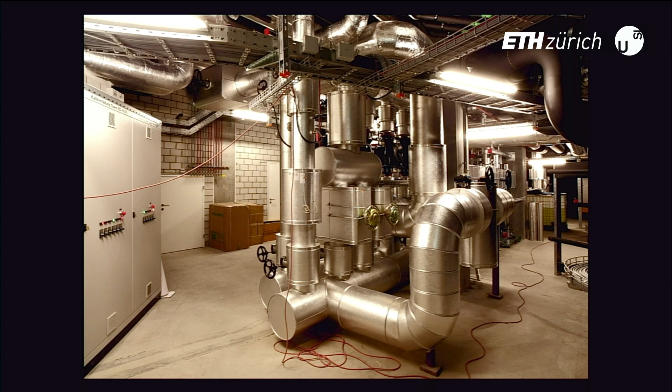However, the building materials stand in relation to other substances, to fuels, to pollutants. In fact, today, we all lack an intuitive imagination of these counterparts of the solid materials. We lack an imagination of the liquids and gases that contain energy, of electricity, and energy without substance. And even more, do we lack an idea of their quantitative measures.

Paradoxically, because we all got used to the availability of so much, and I say cheap energy. For most of us, the image of these substances and types of energy manifests itself primarily through their appliances, containers, screens, control equipment, pipes, ducts, lines, switches, intakes, exhausts. We place them in the basement, make them disappear, cover them up for different reasons, noise, smells, and of course, for reason of safety.

Even less do we grasp the carbon footprint that our buildings leave in the atmosphere, and more generally, our way of life. Around 37% of the worldwide CO2 emissions are presumably caused by buildings and by households, by the use for heating, cooling, hot water, appliances, etc. So my idea of architecture as a happy interlocking, a kind of marriage between the Earth's crust and the atmosphere, has gone out of balance.

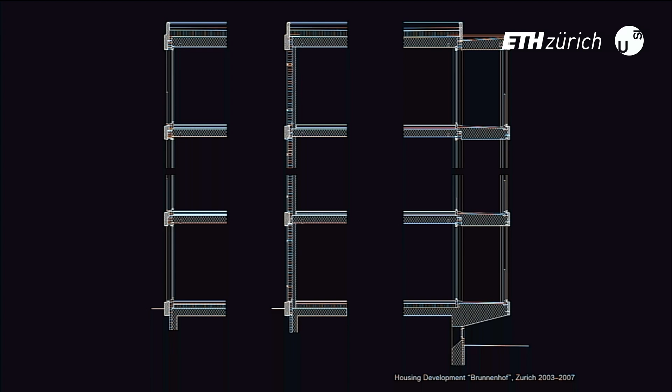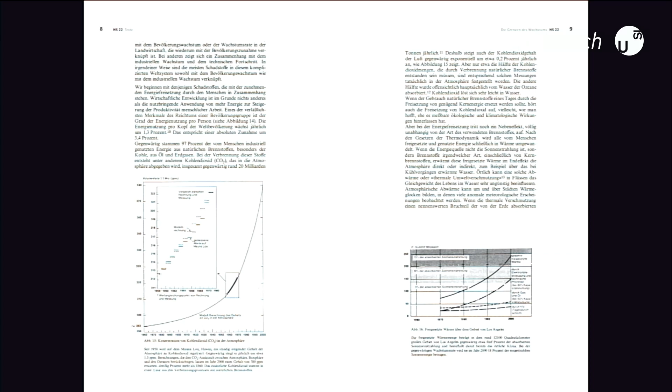I start again with the limits of growth, this wake-up call 50 years ago. And although the book was mainly about the finiteness of resources, a small graph already showed the increase of greenhouse gases. This forecast turned out to be correct. Charts from the BAFU, Federal Office for the Environment, with falling and rising curves. For instance, the annual measurement of CO2 concentration in the air on Mauna Loa, 425 ppm this year.

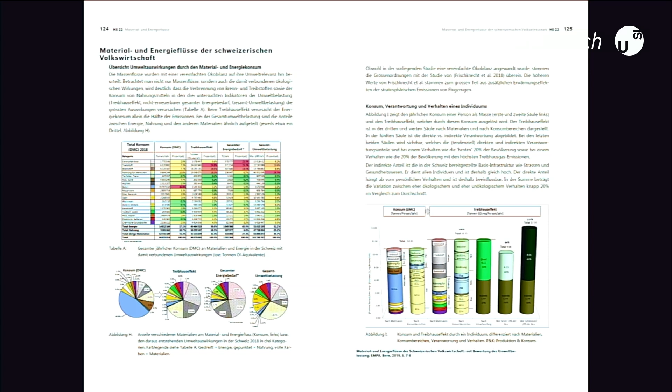In the reader, you find a chapter on material and energy flows in Switzerland. For instance, these data from the EMPA, all shown in pie charts and bar charts. And concrete appears in blue, very prominent in this representation by weight in the lower left pie chart, but less so in the representation by greenhouse gases, the second left.

These bar charts show more clearly the ratios of greenhouse gas emissions. The left bar is for the buildings and their use, middle is for mobility, and the right bar is for consumer goods and production. The most striking quantities we find for the emissions for fuels for heating. This is the dark gray in the left building bar. And then fuels for mobility, the bright gray in the middle bar, and for food, the light green in the right bar for consumer goods.

But of course, the building construction with the various materials also adds a considerable quantity of greenhouse gases. You see in the left bar, again, the concrete in blue, the brick in orange, glass bright blue, steel yellow. They are not a negligible quantity. So we tried to take a closer look, an unbiased look at the materials we love so much, through the lens of energy consumption and CO2 emissions.

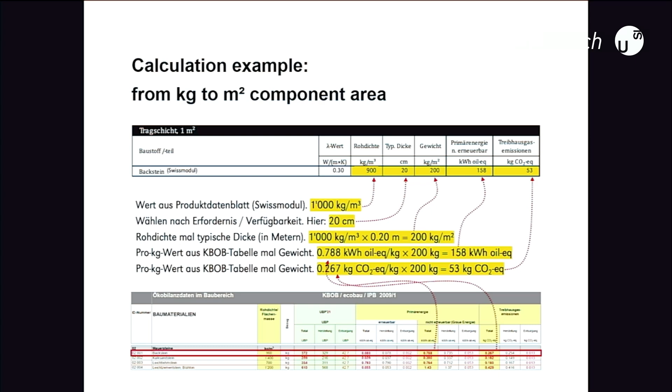On the different data, it's not difficult to calculate. You just need to know the rule of three. And you need to know which column of figures are relevant, of course, and also check the specific weight of the materials. But yes, the eco tool of ZPF structural engineers with Professor Jacqueline Pauli is more efficient if you have the skills to use it.

We took, for example, 1 square meter reinforced concrete wall, 20 centimeters thick, with reinforcing steel as a benchmark, as a kind of currency to compare with other materials. What does this bad guy do? 1 square meter concrete wall causes about 60 kilograms CO2 equivalent of grey emissions for construction and disposal. And the steel reinforcing in it, with approximately 18 kilograms, contributes then to 1/3 of the greenhouse gases.

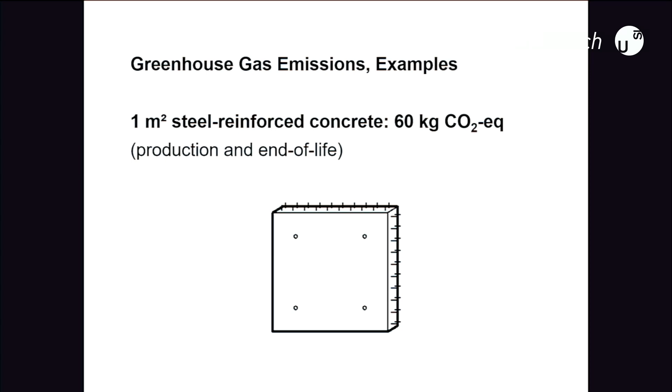And another example, we also compared with the emissions for heating. 1 single heating with natural gas in order to compensate for the heat loss in the uninsulated concrete wall in Zurich costs approximately 70 kilogram CO2 equivalent. This means the heating under these conditions releases more CO2 in 1 single year than the construction of the wall cost, which might last for half a century, it depends on us.

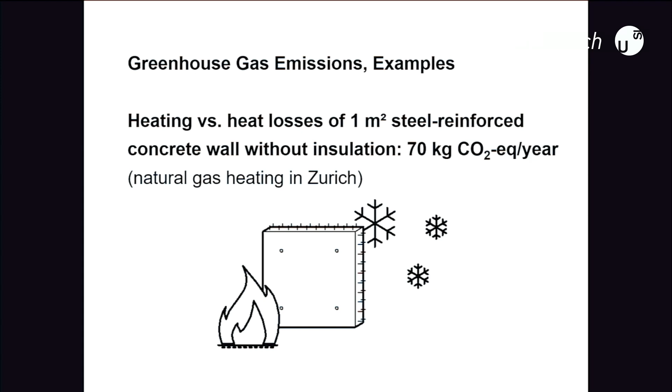And 1 single Bitcoin transaction generates around 400 kilograms of CO2 somewhere in the world, which is as much as 7 square meters of concrete wall, 20 centimeters thick, with reinforcing iron. According to some sources, it's even significantly more.

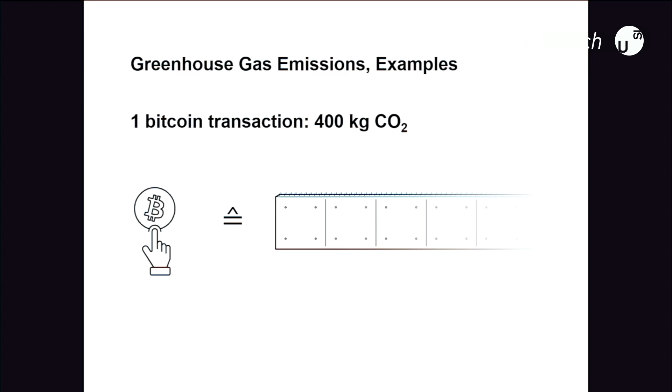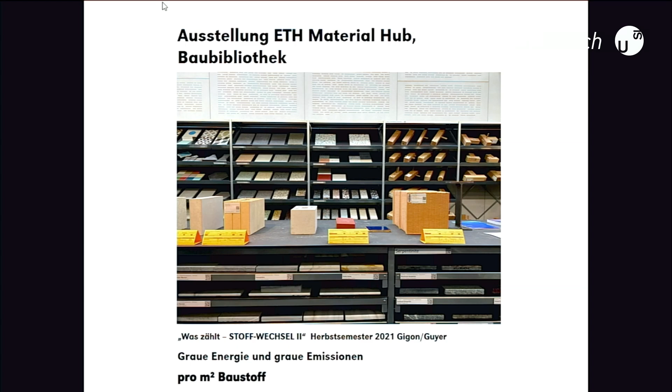With seminar evenings, we invited and involved experts and colleagues and discussed with students on Zoom. The invitation poster was a cheat sheet with interesting data. And we installed an ad hoc exhibition at ETH Library, Material Hub, with the CO2 data of building materials to get an overview. All the data, again, related to 1 square meter material and standard dimensions used on site. And you can discover how far we got during the last semesters at ETH. The link Infostand, Energie und CO2 should still work. Please help yourself generously.

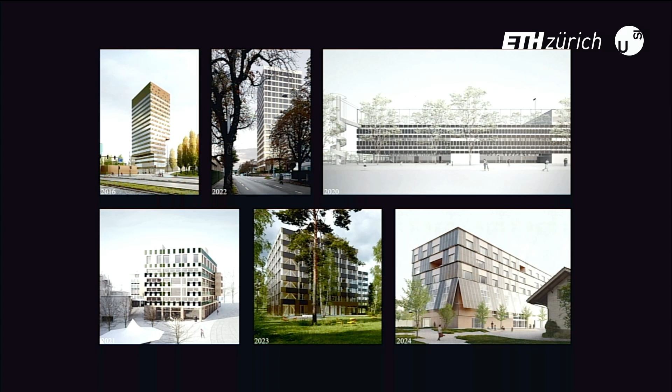And what did we do in our practice in the meantime? We tried to win competitions. The visualizations just show a few competition projects, all of them with PV panels on the facade, dark, uncolored, efficient, instead of trendy coated ones with layers of bright colors and therefore impaired performance. We could not win any of them.

But during this planning process for the multipurpose building for the Museum of Transport, we were able to convince the client that we should change the design of the facade again and continue with integrated PV panels. Together with the artist Urs Beat Roth, we proposed a pattern which produces a kind of trompe-l'œil between windows and PV panels. We mounted many PV panels towards the south, just a few towards the northwest, and none towards the narrow courtyard. The facades are now insulated here with 30 centimeters glass wool and clad with thin perforated metal sheets.

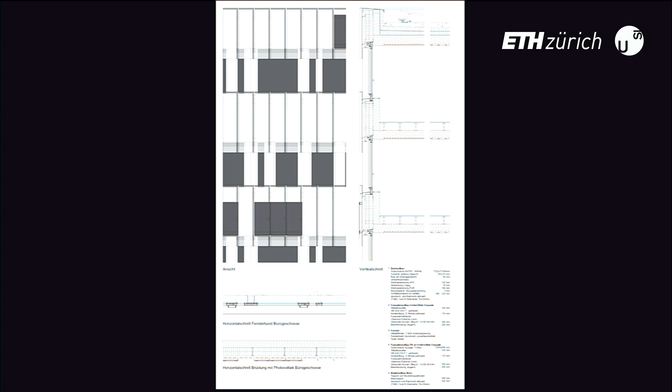A water-to-water heat pump in the basement supplies not only the building with heating and cooling, but already its neighbors and in the future also a large part of the site. But the difficult geology of the ground and the large span of 30 by 30 meters for the ground floor exhibition space asked for an elaborate concrete construction. Despite the three office floors on top, the big exhibition hall had to be pillar-free.

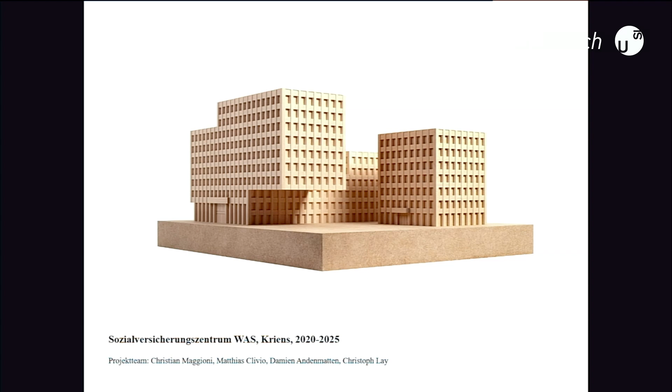But we could also win competitions with different concepts. For example, the office building WAS, so social insurance center in Kriens, Luzern, based on the principle of thick walls and reduced openings, the building should be able to manage without heating, similar to the building 2226 of Baumschlager Eberle, and in collaboration with them.

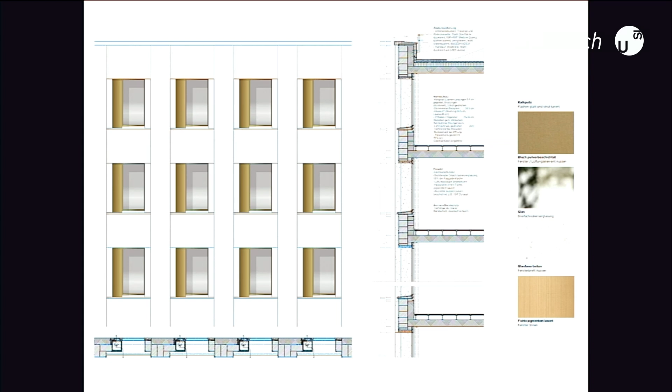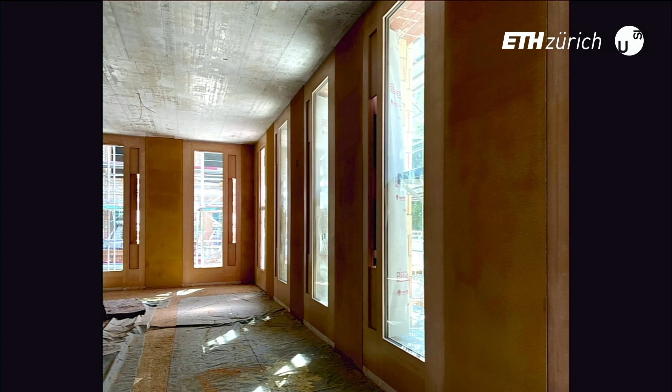The load-bearing walls of the upper parts are brick and clad with insulating bricks, and the load-bearing structures of the lower parts of the 10-story buildings and the cantilevers are in concrete, and they are clad with insulation bricks too. The dimensions of the walls vary from 68 to 80 centimeters. A mock-up shows the future plasterwork of the facade, and the walls in the interior are rendered with clay plaster that will ensure good moisture levels.

Ventilation is provided by CO2-controlled automatically opening window flaps. And the energy from lights, computers, and people will be sufficient to heat the office floors. For meeting rooms, cafe, etc., an additional heating is needed.

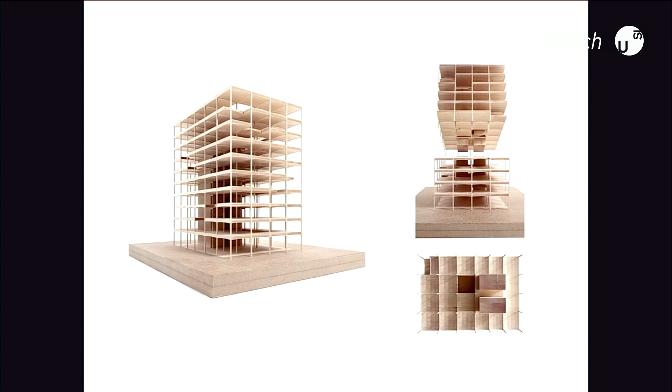The Crea Tower, an office high-rise of 40 meters in Zug, follows a different concept. Here the focus is on a light structure with little CO2 emissions combined with the use of PV panels. The floors consist of prefabricated RFS Rippmann Floor System elements developed with Philippe Block and his Block Research Group. And the PV panels form a brise soleil.

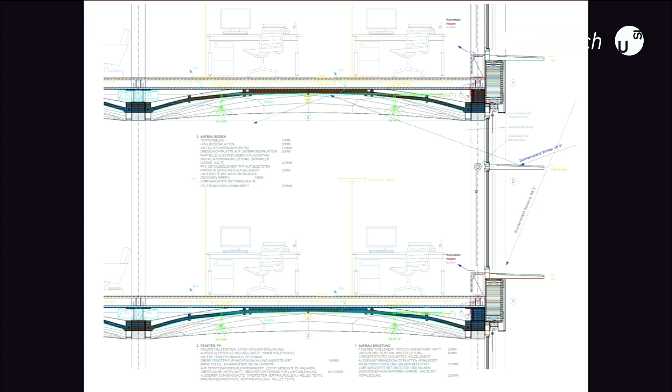The floor element is a very thin structure which gains its strength through geometry. The vaulted floor elements of 6.15 by 6.15 meters do not require reinforcement steel bars and have a thickness of only 8 centimeters. This is the competition detail. During the planning process, several demands led to adaptations of the ceilings. Now with 2 times 8 centimeter concrete and a hollow core, 16 centimeters in total is still a very thin structure for the given span.

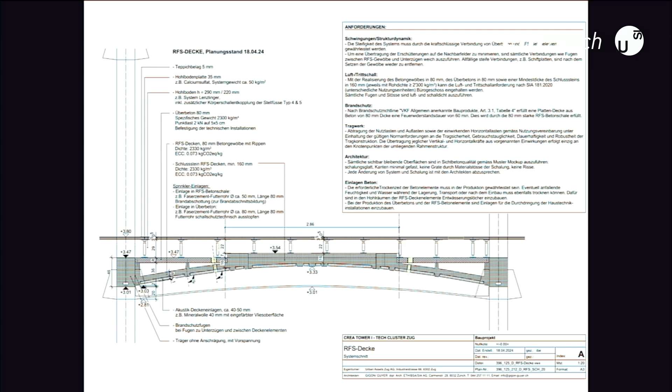So, important to notice, not the requirements for the load-bearing structure led to the adaptations, but the requirements for sound transmission, fire resistance, vibration behavior, and the building logistics, etc. This is a mock-up and a test element.

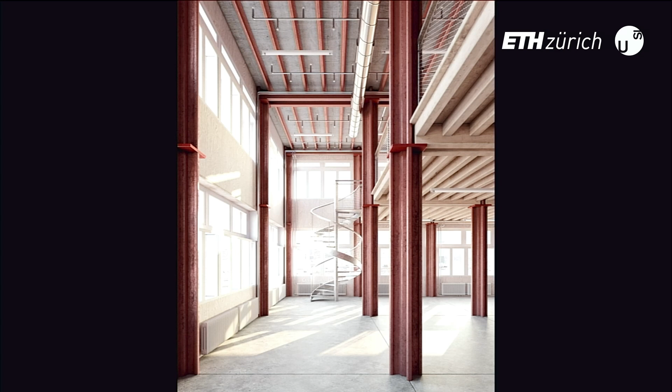And the next project. We could also win a competition for a workshop building for the SBB, Swiss Federal Railways. The task for the workshop building was not only to construct robust ceilings for high floor loads, but also at the same time to find a construction with CO2 values not higher than 5 kilograms CO2 per square meter a year. This ambitious target could only be reached by reused material.

Old railway tracks, which have to be replaced annually, form a mine of scrap metal to be reused in the buildings for construction. With the steel railway tracks, columns can be formed, and they are used as ceiling beams. And depending on which elements can be found in the second-hand material market, the building could look like this. Zirkular, a firm Barbara Buser co-founded, is supporting the team in research for reuse material.

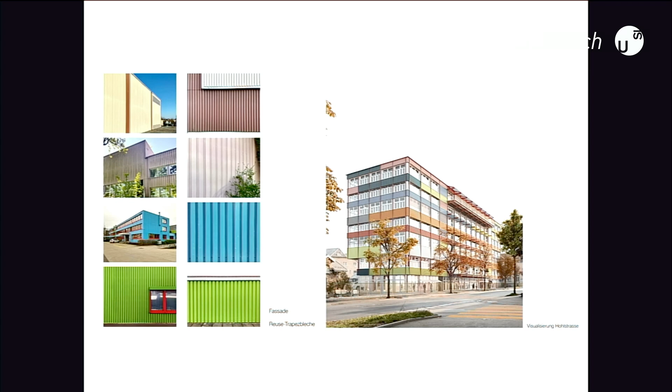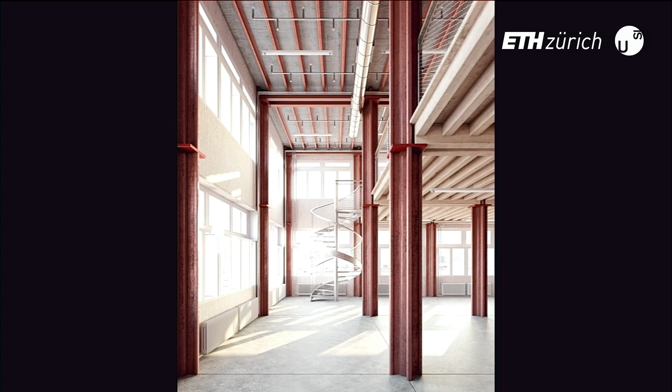Oh, sorry, thank you. I should look on the pictures too, not only into the text.

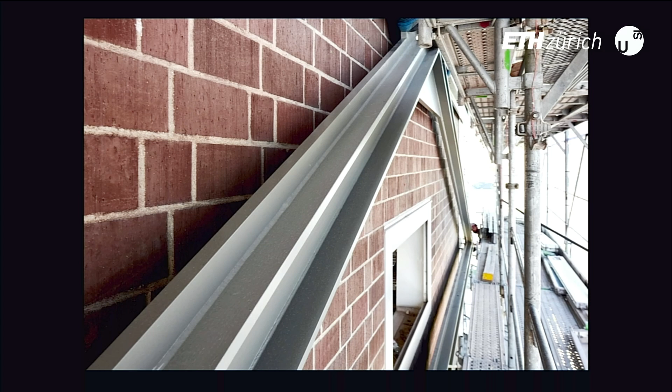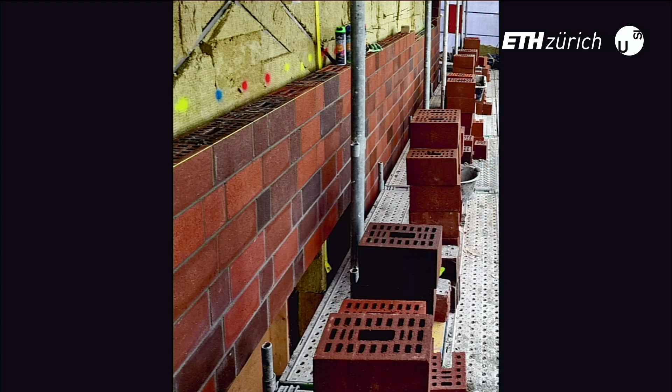Thank you. This is the building as we found it. And this is the retrofitting reinforcement. And we were able to convince the client to combine both with an energy-efficient refurbishment, with 20 centimeters of insulation clad with a new clinker brick wall, which would withstand the weather better than the former brick wall. This is a view of the renovated building.

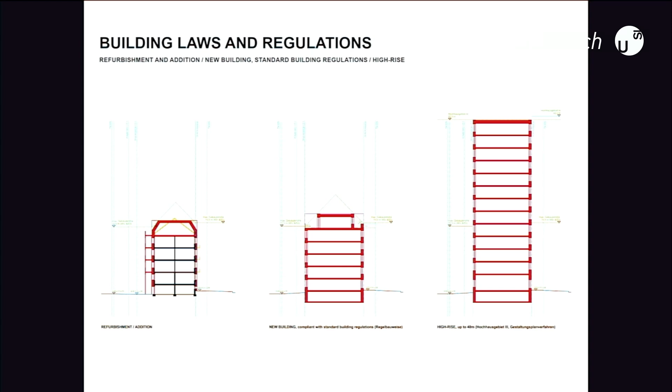And this example, the next project, shows the challenges that can be connected with energetic refurbishment. You see a well-maintained, solid residential building from the 30s with rendered brick walls and wooden ceilings. What are the options for a client? The building law would permit a high-rise building or a replacement of the building in standard construction. Instead, we suggested to study how the building could be made more energy efficient and also have an extension on top, the left solution.

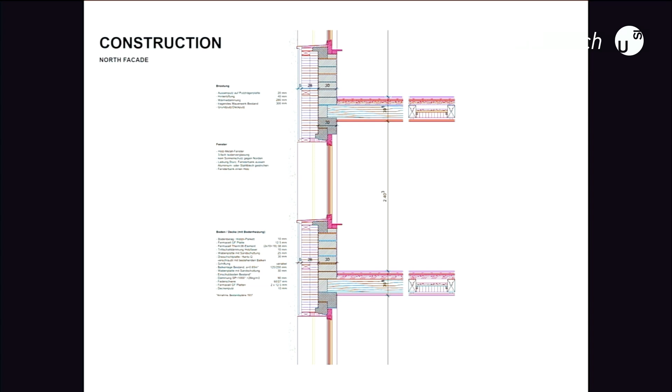But we learned that upgrading the facade and switching to a heat pump would have to be accompanied with a general renovation in accordance to today's stricter standards and regulations in other fields. For instance, for the existing wooden beam ceilings, the standard today asks for better sound insulation, improved fire protection measures, earthquake resistance upgrading, etc. This means a costly core refurbishment, of course, with accompanying cancellations of rents. Can we question these regulations?

Scrutinize them? Not in reality. The architects have to fulfill them. So today, many owners who want to improve the CO2 footprint of their buildings, which are still okay, are faced with difficult decisions, refurbishment or new construction. And please note, approximately half of the buildings in Switzerland are not insulated yet and/or are still heated with fossil fuels.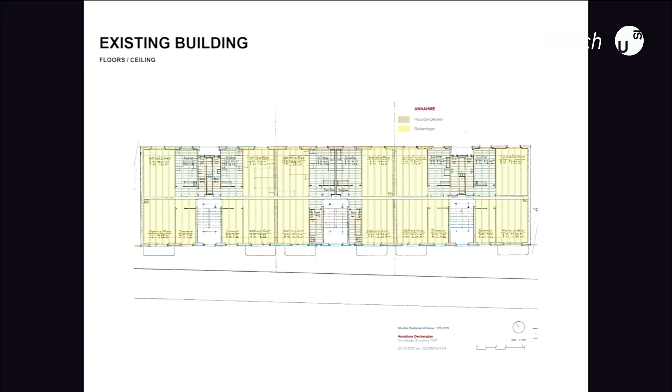So, this last example is much simpler. It shows a solution for a decisive energy and greenhouse gas upgrade regarding the operational values without structural intervention. This is because the basic requirements were already met. The two houses from the late 90s are already insulated with 12 centimeters of rock wool, quite modest, and have underfloor heating.

But firstly, the residents lowered the room temperatures to 19, 20 degrees, and placed thermometers in the rooms in order to control the temperature. This already resulted in a reduction in heating energy of approximately 25%. And they put on jumpers now and then. Then the natural gas heating was replaced with a brine water heat pump. As a result, the energy consumption was once more reduced by a factor of 5, even bigger than 5.

And with the heat pump operating with Swiss electricity mix, the CO2 emissions are now around 10 times lower than before. Operating with solar power, it would be more than 20, even 30 times lower in comparison to the former initial CO2 production. A PV system on the roof is in the planning phase.

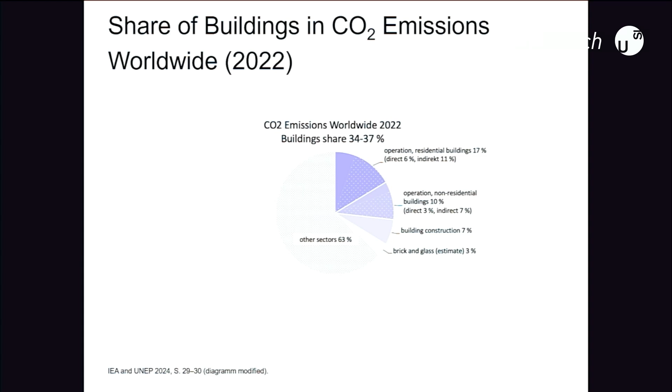Let's take another last look at the figures and data. You see what it is all about. The graphic shows the share of buildings in CO2 emissions worldwide. Construction is around 10%. The use of building, heating, electricity, etc., still around 27%. 37 in total.

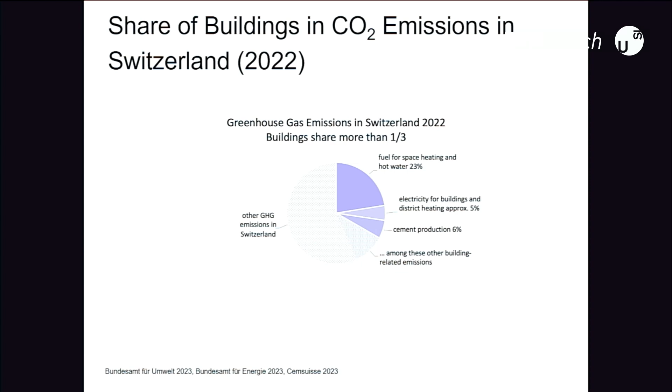And the graphic from Arndt Kölsch shows the share of buildings in greenhouse gas emissions in Switzerland 2022, according to the data of the Federal Office for Environment. The construction is in the same range, approximately 10%, and the use here is also still dominant and around 30%. Altogether around 40%. But this is good news for architects and users too.

With Arndt Kölsch, we are in the process of compiling a handbook that will provide architects and students and clients and lay people with an overview. It organizes the many figures and data. It also shows how to calculate with them, simply, and even where to find more data if you want to go further. It's a kind of bridge builder between science and practice, a book as we would have wished for when we started to deal with the complex matter. It will be published in summer.